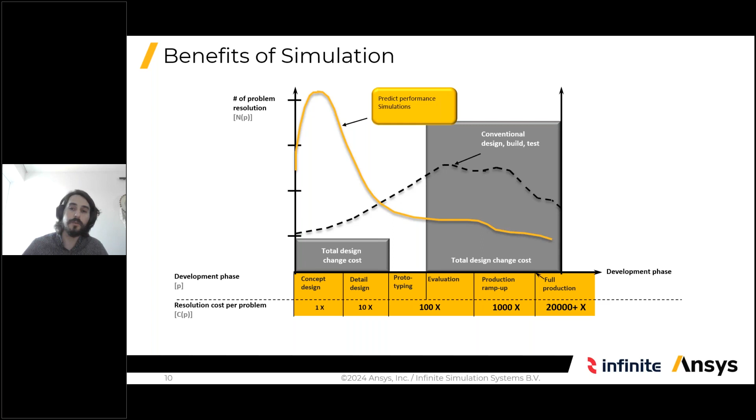Now let's talk a little bit about electronic design challenges. Engineers today must address a wide variety of design requirements when designing electronic systems. These range from electrical, such as signal and power integrity, thermal, such as in the implementation of optimal cooling strategies, or mechanical, the ability to withstand thermal cycling, shock, vibration, etc.

Furthermore, products are expected to meet lifetime requirements to ensure that they meet their intended function for a very long time. Engineers also need to consider the effect of manufacturing, transportation, and product operation as part of their design process.

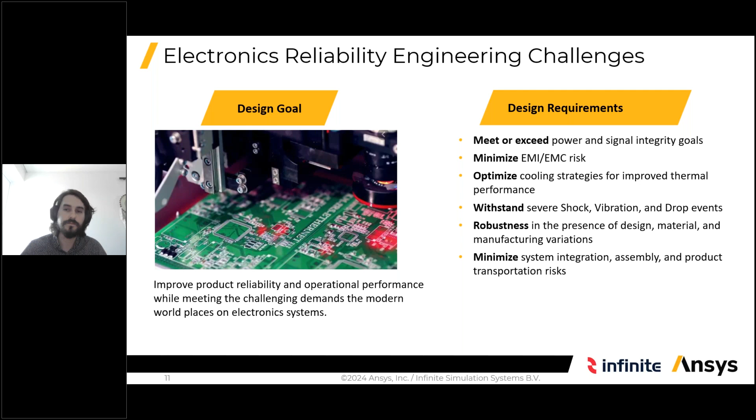ANSYS provides a suite of tools and workflows that address a wide range of electronics reliability concerns. Each aspect, electrical, thermal, mechanical, multiphysics, plays a key role in the understanding of how electronic systems operate and perform in a variety of applications.

In this webinar series, we have already done 3 webinars on different reliability subjects. First, we started with signal and power integrity. Then we talked about EMI, EMC reliability. And in our 3rd webinar, we talked about thermal reliability. In this last webinar, we will be talking about lifetime predictions.

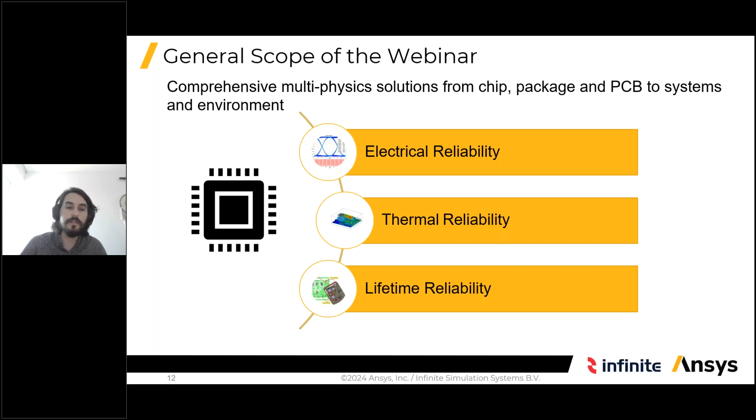So let's take a look a bit at the lifetime reliability. Lifetime predictions of products can be very challenging and cannot easily be based on experience or know-how techniques. This is of course due to the ever-expanding complication of electronic devices. The most reliable way to predict is with means of rigorous physical testing on prototypes. This, first of all, is very costly, but most importantly, a very time-consuming test to perform.

For example, a powered thermal test cycle can last up to thousands of hours before we have the first results. And if the results are lackluster after that, we need to again prototype and redo this test. So you can understand that not only the costs, but the time constraints can be great for this.

Since we want to deliver a viable product with a long lifespan, these physical tests are required, and there are many compliance standards to be fulfilled. So also, this is something to take into consideration. On top of that, warranty claims on products can be extremely costly for your business, so cutting this down can be very important.

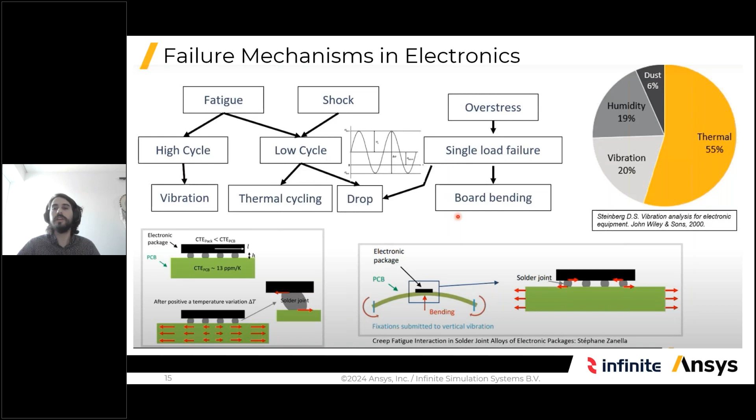When we talk about electronics reliability, and especially lifetime reliability, some of the failure mechanisms that we typically see are listed here in this graph. As you can see, the majority have ties to thermal, vibration, or humidity issues that cause electronics to fail over time. Vibration and thermal can cause 75% of failures, and mainly fatigue plays a very big role here, fatigue over time. Also, overstress with extensive board bending or sudden drops can also cause failure. Today, we will be talking a bit about all of these kinds of failure mechanisms.

Let's take a closer look at thermal issues, which we talked about more extensively in the previous webinar. However, this time I want to see them from a lifetime perspective. With the thermal expansion coefficient changing with the rise and fall of heat, we can have solder joint fatigue. So during a temperature cycle, a solder joint connection expands and contracts. With many consecutive cycles, this can cause degradation of the connection and thus failure of it.

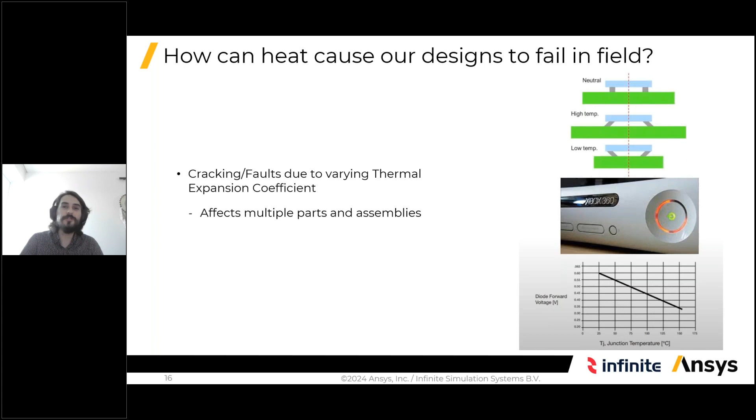This was a very big issue with Microsoft's first gaming console, leading to a whopping 40% failure rate of their first model iteration. A very, very big amount and very big expenses in warranty claims back in the day for Microsoft. Solder joint fatigue is one of the leading causes of PCB failure.

So solder joint fatigue is mainly caused by repeated exposure to temperature changes, which happens naturally either via the on-off operation of the device or the thermal changes in the environment of the device. This exposure causes cracks to form on the solder, and with repeated cycling, this damage accumulates, leading to further fractures in the solder joint and eventually to failure. Many things impact the solder fatigue: the maximum and minimum temperature of the temperature cycle, how long it stays at its minimum and maximum, the electrical properties, the material properties of the PCB, etc.

Having a good understanding of an electronic system's electrical, thermal, and mechanical performance under various conditions is important. However, reliability physics analysis, as it is commonly called, tells us how a product is expected to last under such conditions. Tools like Sherlock, which I will be talking about in a minute, can be used to determine the time to failure or cycles to failure for all the components on a device and on a PCB using various built-in reliability models.

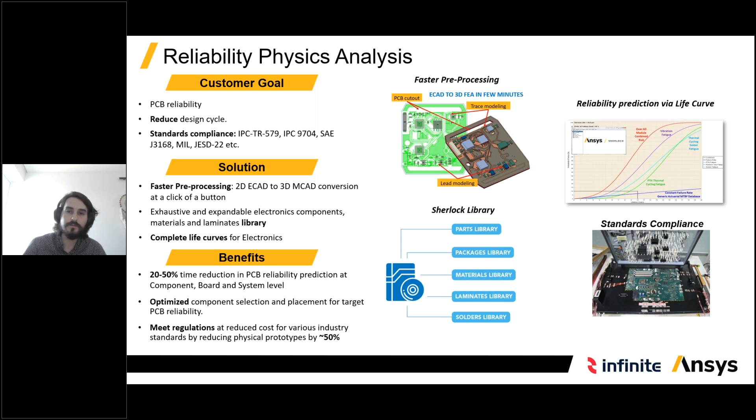So let's take a look at Sherlock as I talked about before. Sherlock is a reliability physics solution that helps you predict product failure early in the design process, quickly and accurately. Sherlock solvers are based on physics and not on design rules or past data, just purely physics. This will help you mitigate mechanical, manufacturing, and thermal risks.

Sherlock is a tool that is meant to be quick and easy to use, and one of its main capabilities is that it allows us to pre-process MCAD and ECAD files and quickly bring out the model without us, the users, needing to actually make it ourselves in a CAD environment. As a result, Sherlock will output a mean time to failure of the product by accounting for all of the different risks: vibration, solder fatigue, and more we will see later.

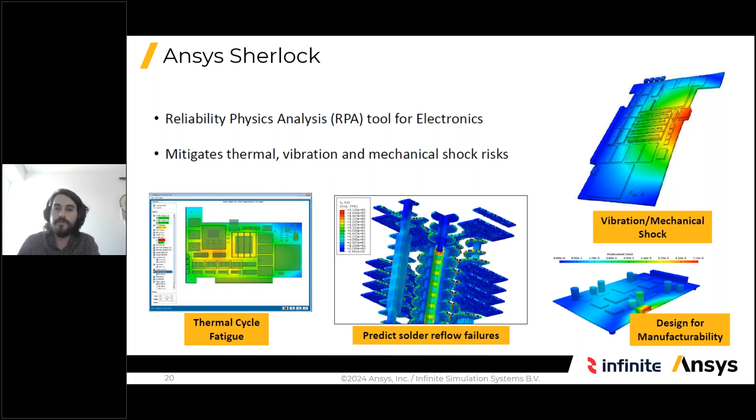Sherlock can be used and help with initial part selection, of course. You can quickly assess which part will have a better lifetime for your design and maybe change a part that you already have on a previous design just because of costs and same efficiency.

It can also greatly help with quick checks for part placements. Maybe you have some natural vibration on your board and you want to check where each component is optimally placed to avoid issues due to this vibration. Choosing the final layout and bill of materials, we might also need to ensure that we have designed for manufacturability, and Sherlock can help us with that as well.

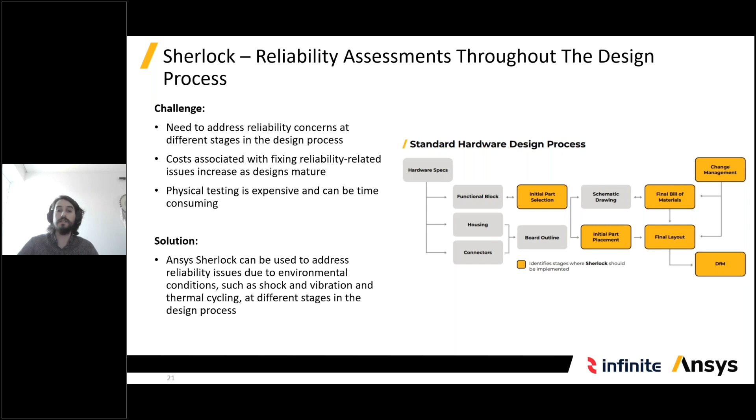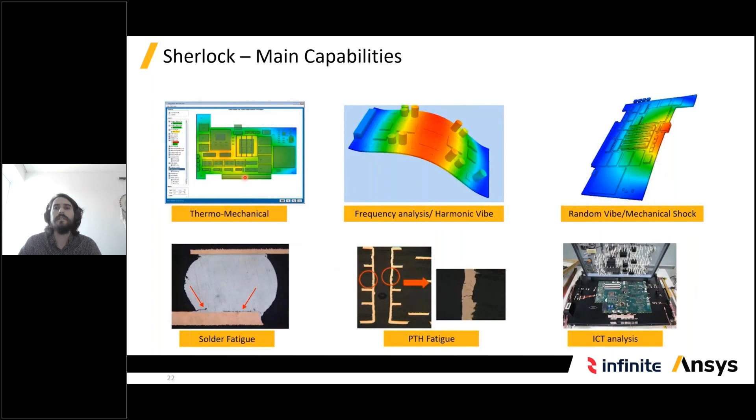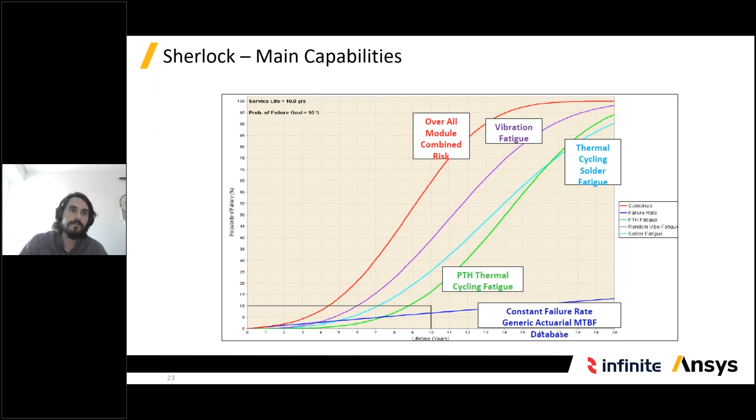As mentioned earlier, Sherlock has a very low skill level floor. It's meant to be very easy to use. We just need to feed it with accurate ECAD or MCAD data, and it will automatically recognize all of your components, if not all, most of your components. It will immediately see different materials, laminates, etc. And then it will make a model of your board in a matter of minutes.

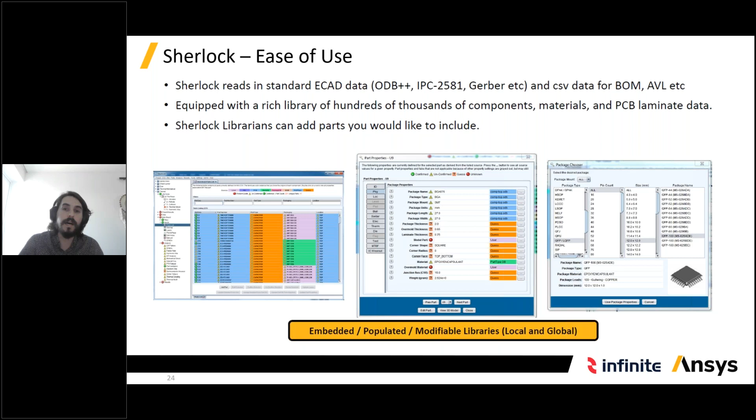Sherlock also has a very rich library of close to millions of components with data tables and specifications coming straight from the manufacturers. This library, of course, is constantly updated by ANSYS, but also if you have a more exotic component yourself, you can add it to the library and you can easily change its specs and add the data that you want for this specific component.

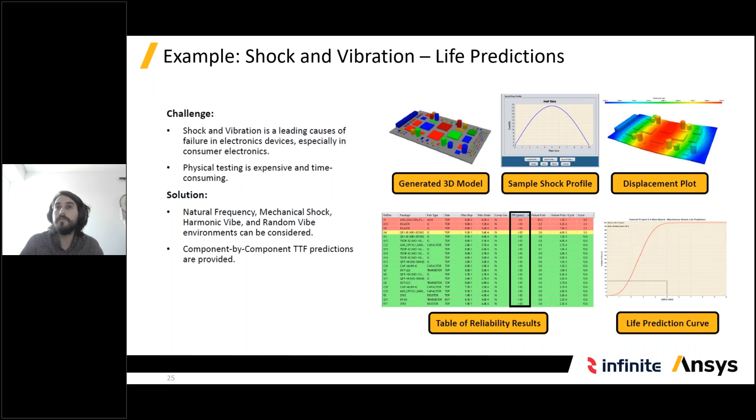One other area that Sherlock can greatly help is testing out different what-if scenarios. This gives the designers a lot of flexibility and enables them to make trade-offs and important decisions. Maybe a different package type for capacitors is a viable option to reduce costs but keep up the lifetime reliability. You can test this with Sherlock.

Or maybe you have a new manufacturer that works with a different laminate. How would this affect the lifetime of your product? You can check this in Sherlock. Sherlock can give you the data to make important decisions for your design very early in the process of designing.

Let's now check a small case study which showcases the usage of Sherlock. So let's say we need to make a design decision on where this system on chip package will go on our board, both for electrical and thermal behavior, but mainly to withstand shocks. The shock profile for this example is 30G for 50,000 times. So this system on chip should withstand 30G 50,000 times.

So where should we as designers place the component? Is it better suited for placing it on the top, on the bottom, or in the middle of the board? We can bring the ECAD file to Sherlock immediately and input the shock profile of 30G for 50,000 times, and we can get results immediately.

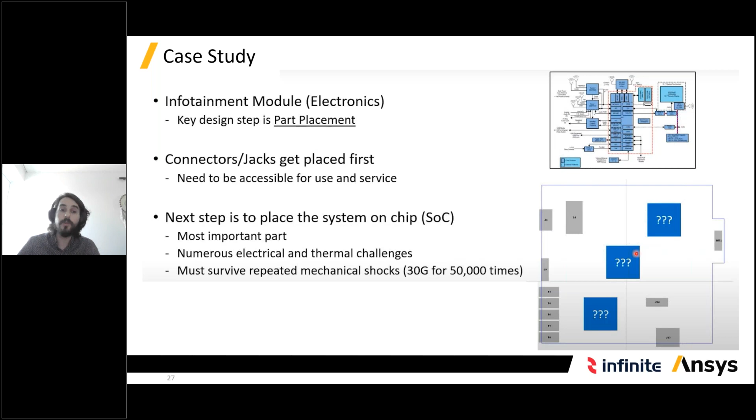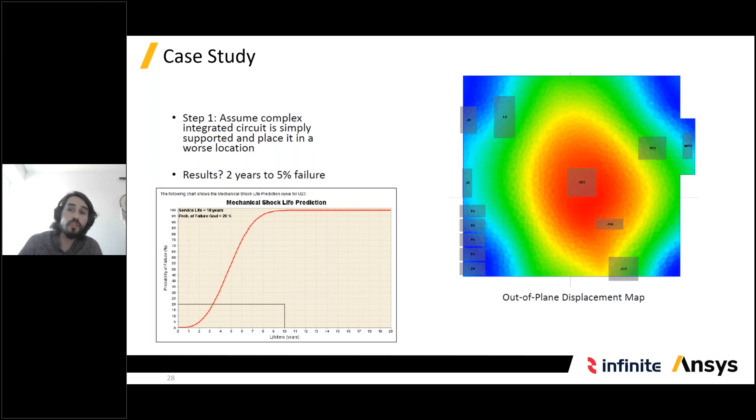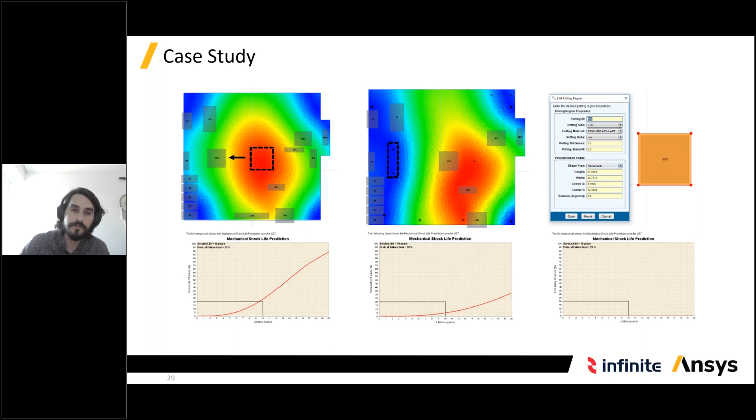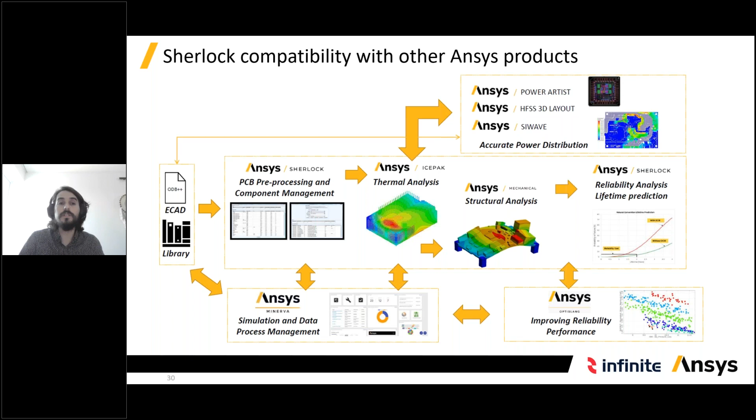I lastly want to touch on the subject of multiphysics and coupling with other solvers in the ANSYS portfolio. As we have discussed different types of software during this webinar series, Sherlock will always have one or two-way coupling with all of the software that we talked about and with a lot of other software in the ANSYS portfolio. For example, we talked about HFSS, Icepak, Mechanical, SIwave in this webinar, and these all can be coupled with Sherlock for an in-depth simulation analysis of your whole design in different physics. Unfortunately, I do not have more time to get into the details, but if you're interested to learn more about multiphysics and co-simulation, do not hesitate to contact us.

Lastly, I want to just have a small recap. So what is Sherlock? It makes it easy to have a finite element analysis. It makes it easy for us to process results and data. It's very user-friendly. It communicates quality and reliability throughout the electronic supply chain. It will reduce your warranty returns in the field if you use it successfully. And most importantly, it will help with avoiding redesigning and retesting of your boards and your products due to failures.